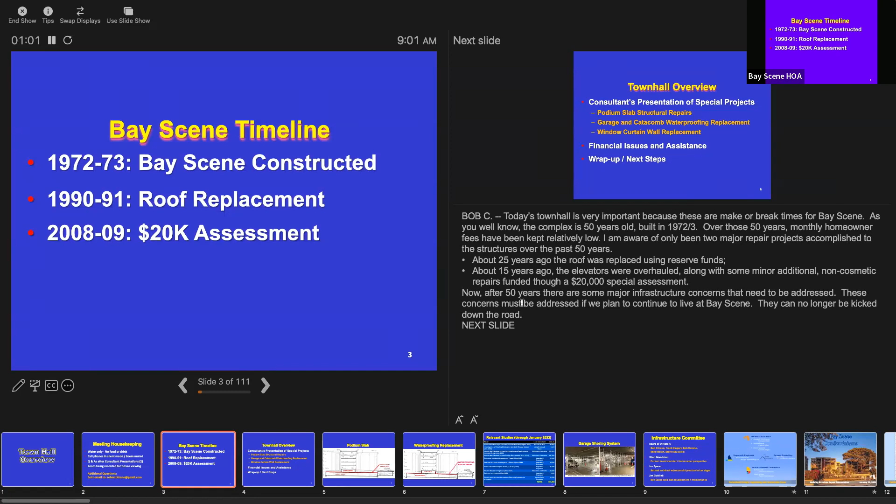Now, after 50 years, there are some major infrastructure concerns that need to be addressed. These concerns must be addressed if we plan to continue to live at Bay Scene for the foreseeable future. They can no longer be kicked down the road.

Our consultant team will be presenting detailed information on three proposed special projects: structural repairs to the podium slab or garage roof, replacing the garage and catacomb waterproofing, and replacement of the window curtain wall. After each consultant, you'll have time to ask questions.

There will be a very short break after each of their presentations. We have also asked a mortgage broker, Mr. David Stein, to explain to interested homeowners various options to borrow funds to pay for their share of the proposed special assessment.

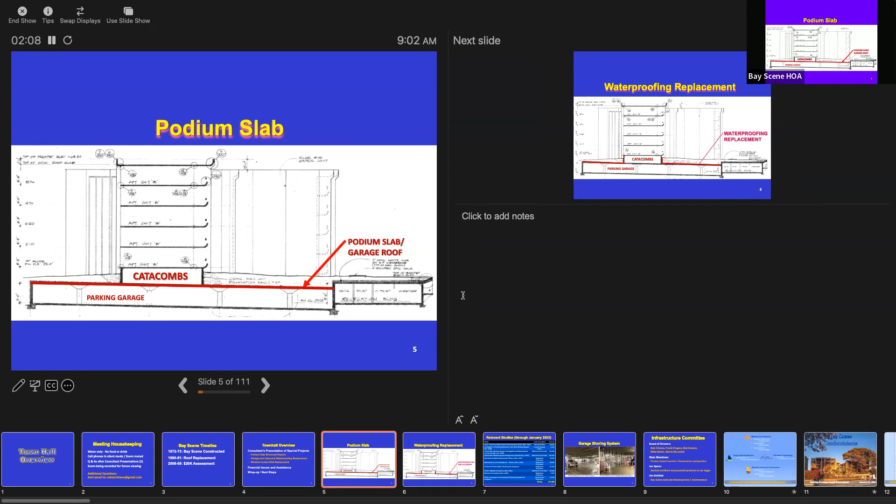Next slide. For clarity, you'll be hearing the term podium slab. The line in red on this slide is the podium slab. It is basically the roof of the underground parking garage, and we refer to that as the podium slab.

The space directly above the garage and below the first floor units is referred to as either the catacombs or the crawl space. Next slide.

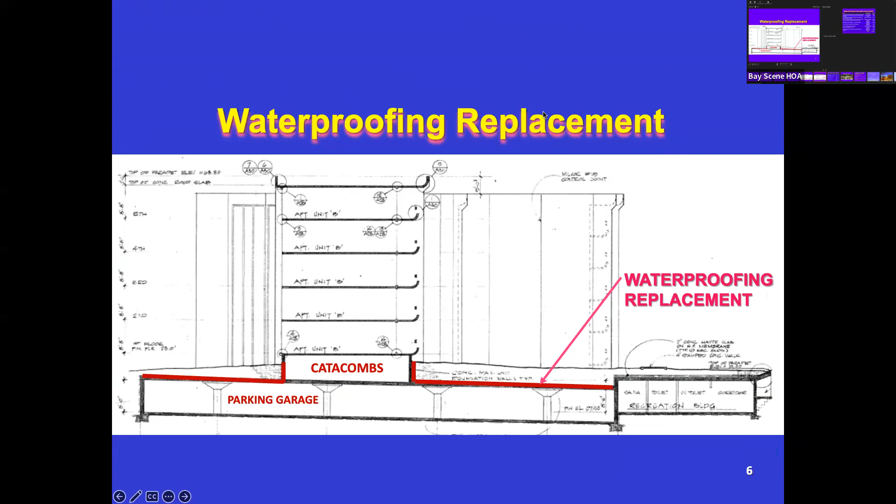Okay, this slide shows where the waterproofing is located that needs to be replaced. Basically, it is located above the garage roof, outside of the building footprint, along the outer walls and along the outer walls of the catacomb—the areas shown in red on that slide. You'll get much more information on this in the consultant presentations. Next slide.

This shows all the relevant studies we've gone through since 2020. Approximately 10 years ago, the Bay Scene Board at that time began looking into replacing the windows. As this slide shows, what started as an investigation into our windows has morphed into something far more comprehensive. It seems the deeper we dug, the more we found that our problems were more extensive than we knew.

Through our various studies, we now understand that Bay Scene is not a system of individual windows supported on each floor, rather an integrated curtain wall system that supports the windows. This means even if we wanted to, we can't pick and choose which windows to replace. It requires a replacement of the entire curtain wall system.

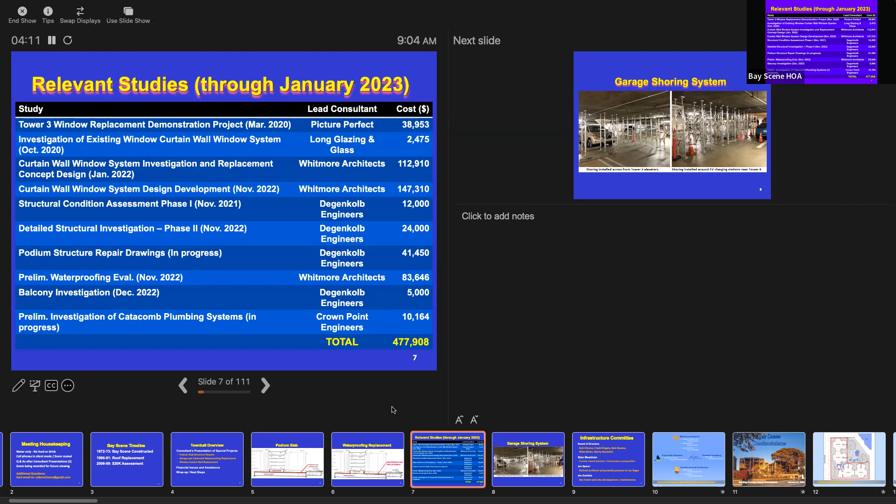Also, in response to homeowners' concerns following the June 2021 collapse of a Florida condominium, the board initiated an investigation to determine whether something like that could happen here. The structural condition assessment identified deficiencies in our podium slab that resulted in the need to erect shoring in the garage. Today, the consultants will be discussing not only the repairs necessary to resolve the current structural deficiencies, but also the root causes of those deficiencies and what needs to be done to prevent more problems in the future.

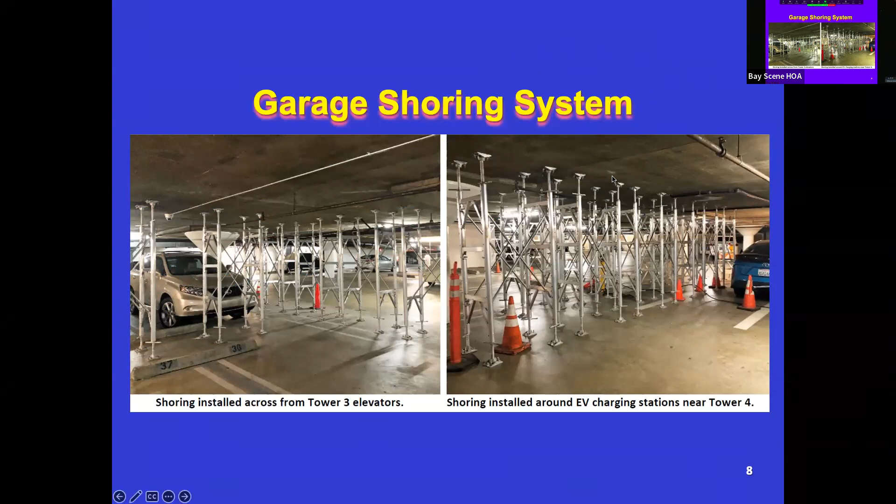We would not be here today without the tremendous support of both our consultant team and the Bay Scene Infrastructure Committee, comprised of both Bay Scene Board of Directors and homeowners. Special thanks to Frank Kingery, who has been the project manager for our consulting contracts, and Bob Van, who oversees all the financial matters, including finding an institution that will loan the association the funds for the special assessment.

Mike Nolan provides a legal perspective, and Marty is always making sure we see the perspective of often overlooked homeowners. Dan Messman has been a tireless contributor, willing to do anything, and is also instrumental in reaching out to homeowners. As the owner of a very successful architectural practice, John Sparr's expertise has been instrumental when reviewing consulting contracts and in helping us understand the technical aspects of the projects.

Last but not least, Jim Gottlieb has developed the Bay Scene website, which is very good. You should check it out, it has a comprehensive, easy-to-use section on the special assessment projects. He's also up there running the show today. Next slide.

I will now turn the presentation over to Doug Whitmore, the principal architect of Whitmore Architects, a firm that specializes in investigating building failures in the context of construction defect litigation. The expertise of this firm has been very beneficial in identifying the condition of the 50-year-old structure of Bay Scene and determining what is needed to restore it to a functional condition. Doug will introduce the rest of the consultant team, who will give two presentations. Next slide, and I will turn it over to Doug.

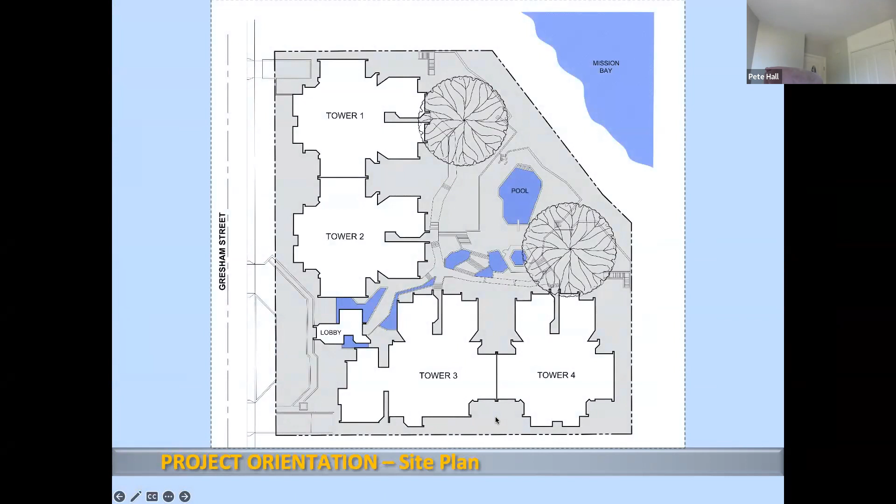So you live at Bay Scene. You probably know this by heart, but of course there are 2 buildings here, made up of 4 towers. Most people at Bay Scene talk in terms of towers and not buildings. There are two towers along Gresham Street, and two towers along the north property line, which in this drawing is at the base. To the upper right-hand corner, primarily southwest from Bay Scene, is Mission Bay, which runs all along there.

You have 2 beautiful Torrey pine trees that are marks of just how special this place is. Besides having a great view of Mission Bay and a great location, those Torrey pines are really cool. In fact, this complex is a very neat complex, and I'm sort of tacitly related to its founding father—the architect, Dan Salerno, was my boss at one point in time. I worked for Dan for about 5 years total, twice.

We knew this project because when I'd walk into the office, there was always a picture on the wall of the project. So it was not surprising when we showed up here. Next slide, please—you know what, Jim, could you go back though, actually?

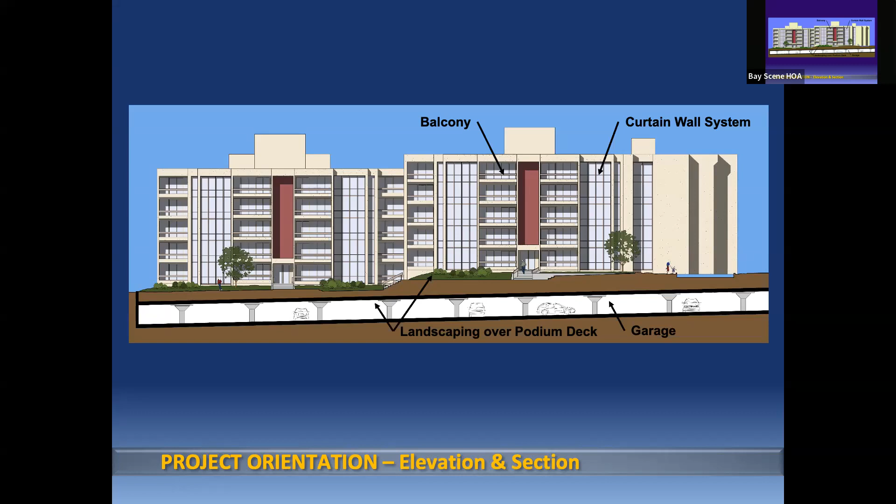We've also drawn here where the garage is. That's sort of the white band across the bottom, and you can see there's earth in brown below it, and there's earth in brown above it. So when you're walking on Bay Scene and you don't see the parking garage, it's because it's below ground. And there's landscaping, and hardscape, and fountains, water features also on that. There are steps that go down to the pool. All of that's happening on top of the garage for the most part. Not totally, but for the most part.

Okay, next slide. We will talk about the balconies in another sense, but I was really only wanting to say that in regard to the curtain wall, we're really not talking about any of the glass that's on the balconies. We're just talking about the 5-story element.

Okay, let's start with the structural repairs. As Bob indicated, they charged Degenkolb, which is Jeremy's firm, with investigating the condition of the concrete that the buildings are founded upon.

Before we go too much farther, if you parked in the garage, you've probably seen this, but if you look up, there's quite a bit of efflorescence, and when it rains, there are places where water is leaking into the garage significantly. To some degree, if you haven't noticed some of it, it's because in the past, as a temporary means of repair, little catchment devices were placed underneath big sheet metal pans, to collect the water so it didn't fall on people's cars.

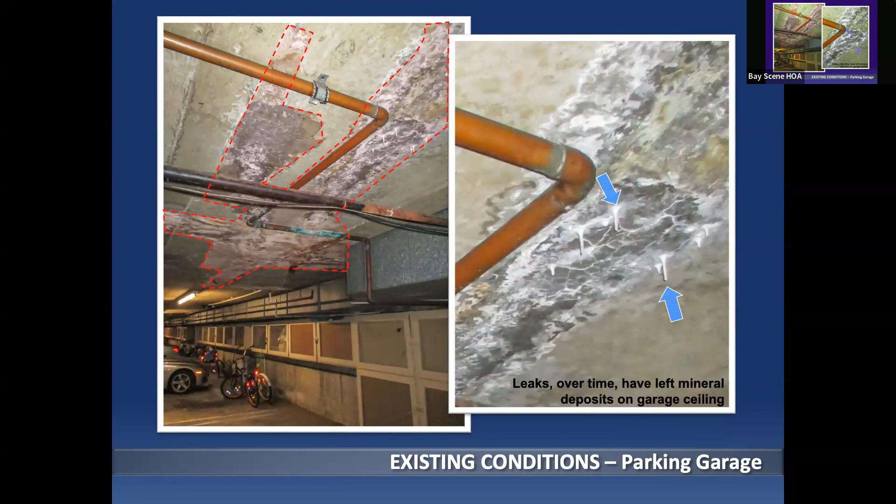So here's evidence of efflorescence, which again is longer term water coming through the podium deck, the lid of the garage if you will. To the point where, if you got up close, you'd see there's almost like stalactites of salt deposits coming down from the ceiling because of the water coming through there that brings the minerals with it. Next slide.

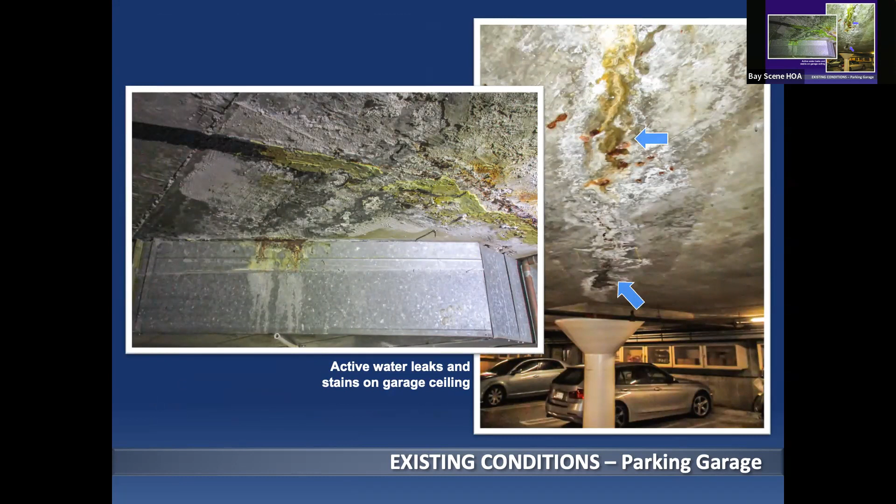More evidence - it's easy to see if you go up and look at some of the ductwork in there, you'll see stains where the water has come down. There are areas where concrete has spalled, and when I say that term spall, I mean a chunk of the concrete fell out of the ceiling and onto the floor. That's a concern from a safety standpoint for your sakes, but it's also a concern as it relates to the podium that's supporting 5 stories of building above it. Next slide.

So at this point, I'm going to show you a few slides that Jeremy provided to me of a portion of their investigation, and I'm going to pause for just a minute and let him talk about the structural repairs. This is ad hoc, Jeremy, so you get to be put on the spot.

During the course of their investigation, Degenkolb found places where the concrete had spalled significantly. The reinforcing steel, which are those rods, was exposed and corroded to the point where the corrosion had actually affected the cross section of the reinforcing steel. In other words, it's getting weaker. Next slide.

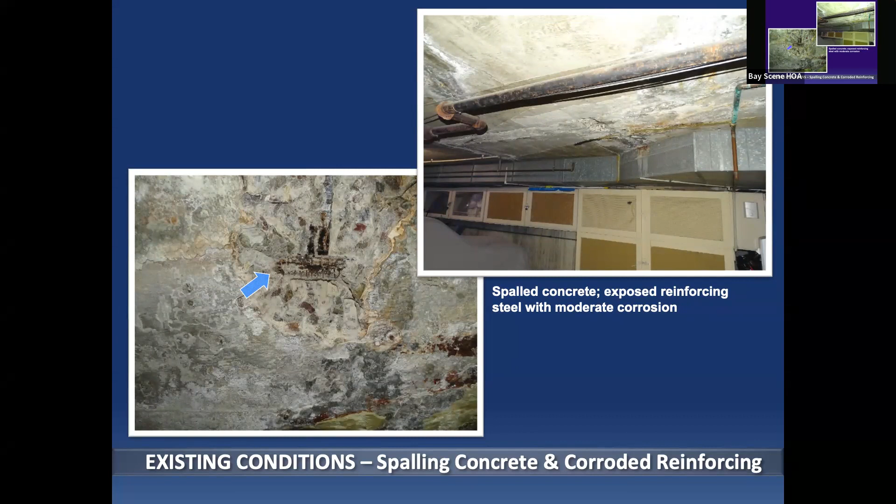And it didn't just happen once, and it didn't just happen a couple of times in the garage. It happened a few times in the garage and also on the top of the garage. Once you go into those catacombs or the crawl spaces, it was also found in those cases, in those conditions as well. Next slide.

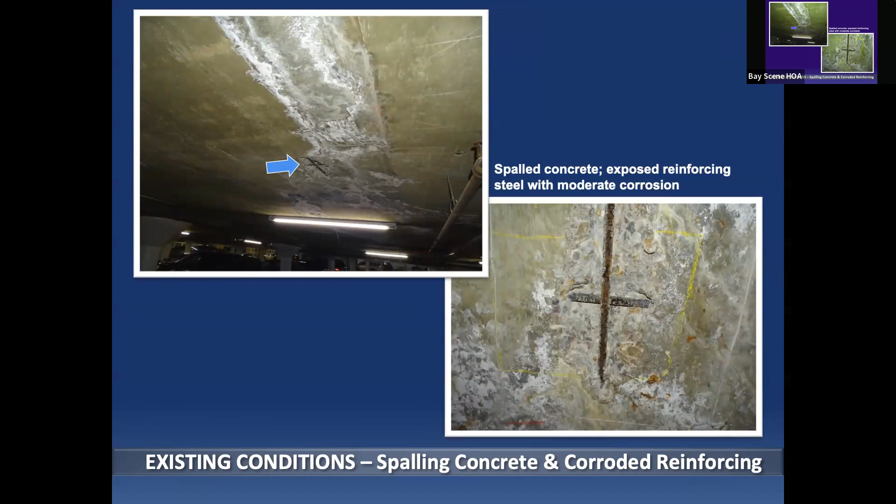So these are the kinds of things that Jeremy's crew came across during their investigation. Next slide.

Now we're in the catacombs, crawling underneath the floor of the first floor units. That's the same podium slab we're talking about, but there's no dirt in here, it's concrete. So when you look down and see that it's rusting, and you can actually see the bars, that's not a good sign. In this particular location, his report says that the reinforcing steel is severely corroded.

So with that, I'm going to pause for a minute and say, what are we doing about the current condition, and why did we put shoring in there, and what are we trying to accomplish? Because that's the first increment of this discussion. So Jeremy, if you wouldn't mind, maybe I'll come on up and interview you a little bit.

So you guys went up and you saw this kind of corrosion and you saw the concrete spalling, and what kind of analysis did you go from there? What did you do beyond that?

Yeah, sure. So I like to use the analogy of when you go to the doctor's office, you typically go in and they'll do a physical. They look you over, they maybe have you do a jumping jack or stretch. And based on that physical examination, they may see something that concerns them and want to have blood work done, or an X-ray done. You don't go straight to the MRI machine, right?

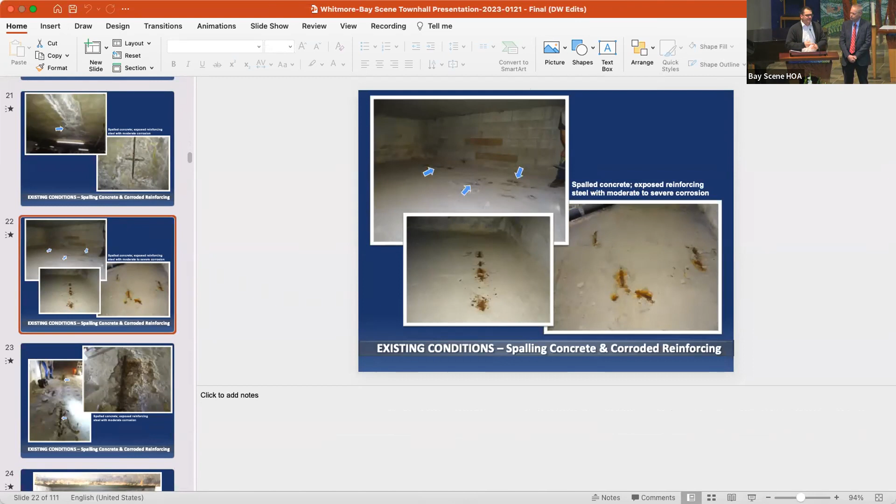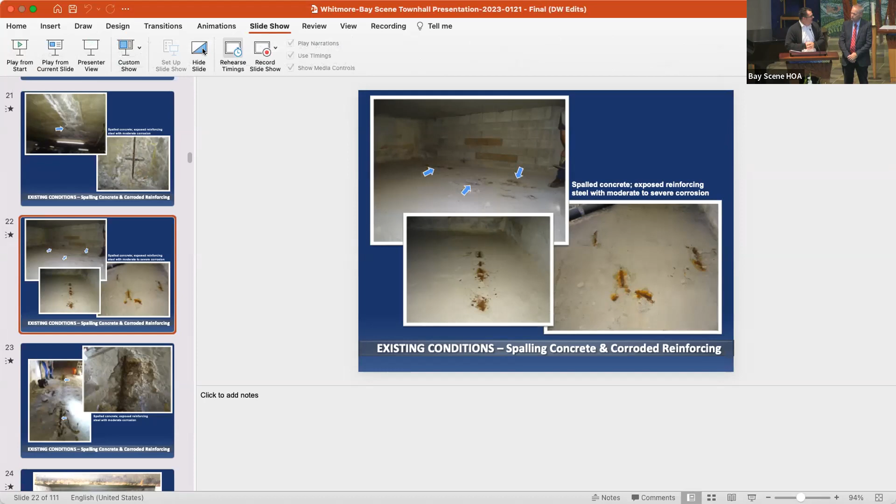Last question, what caused the condition that we're dealing with? Yeah, so there's always a few elements that come together that cause corrosion, but ultimately it's going to be a combination of moisture. Also, as part of our phase 2 investigation, we had concrete chemical testing done, and there was high levels of chlorides found, and that's not surprising because of how close you are to the coast. But as you all know, salts can really accelerate corrosion.

So the fact that there's moisture getting into those catacomb spaces - many times when I was down there, you could see little puddles and pools of water. I think Doug will talk more about the sources of some of that water. That wasn't the scope of my investigation, but we recommend that, yes, the structural repairs be done, but the structural deterioration is essentially caused by the moisture getting into that concrete. So we recommend that Doug and his team look at maybe some waterproofing repairs or recommendations to mitigate additional water from getting into the slab. Great, thank you.

Jeremy's team recommended an investigation related to water getting into the concrete, and our firm was retained to do that. We had already worked on the windows and were refining the window design, but concurrent with that, we embarked on investigating the water intrusion causing the problems. Our presentation will focus on those findings.

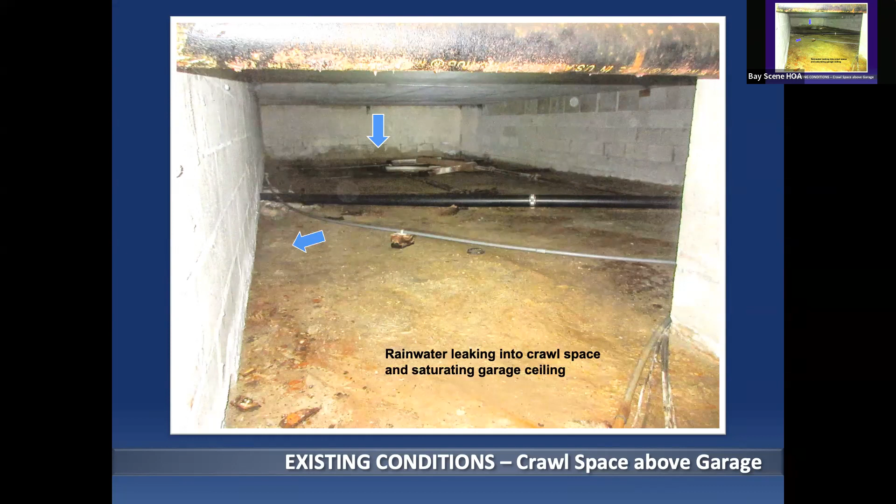More of the same. So when Jeremy was talking about water being a source, if you bring in salt-laden air or water into this area and it just sits on the concrete, it gets a chance to cause corrosion issues and affect the concrete. Honestly, people that have built in construction long enough know that when you do concrete close to the coast, you have to keep an eye on it, because that's a phenomenon that does happen. You need to be careful with that.

More of the same, rainwater coming in, and often it's at the base of the wall, but you can see on the right-hand arrow, sometimes it's higher than that. It's coming in at higher levels. I would say at least a third of the time it's higher than just the base of the wall.

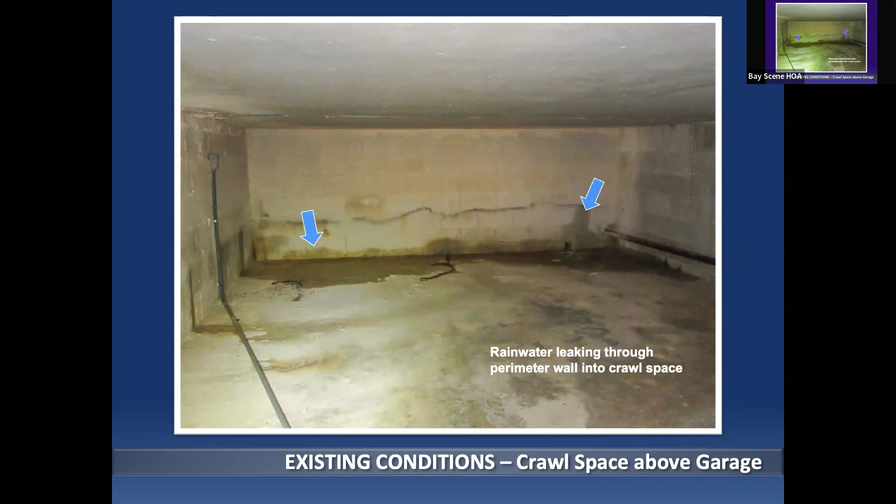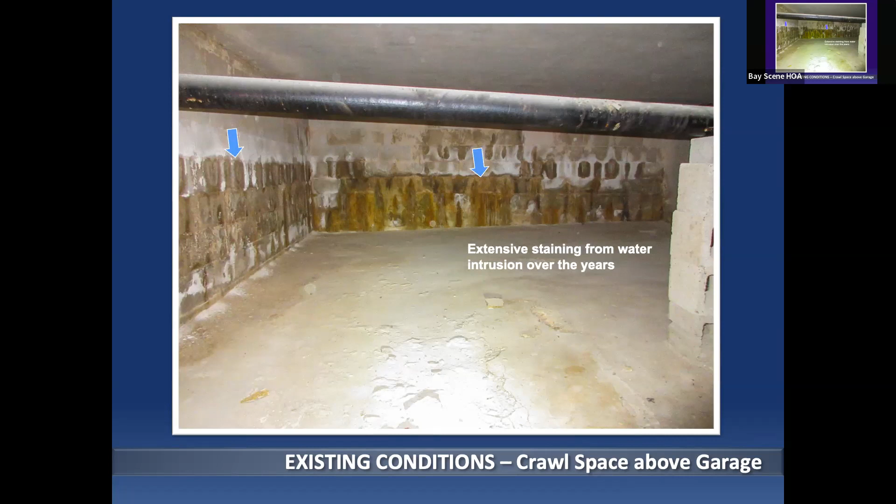This is an area such as we would have seen before the rainfall, where we just had a significant amount of staining from past leaks without the water actually showing up there. That's the result of years of this kind of leakage happening.

So this shows those stains. We have water coming through in an area where one of the repairs was attempted.

As Jeremy mentioned to me in advance, he said even some of your slides show some of this corrosion. So here's a photograph in a leaking area where we saw the steel reinforcing exposed and corroding.

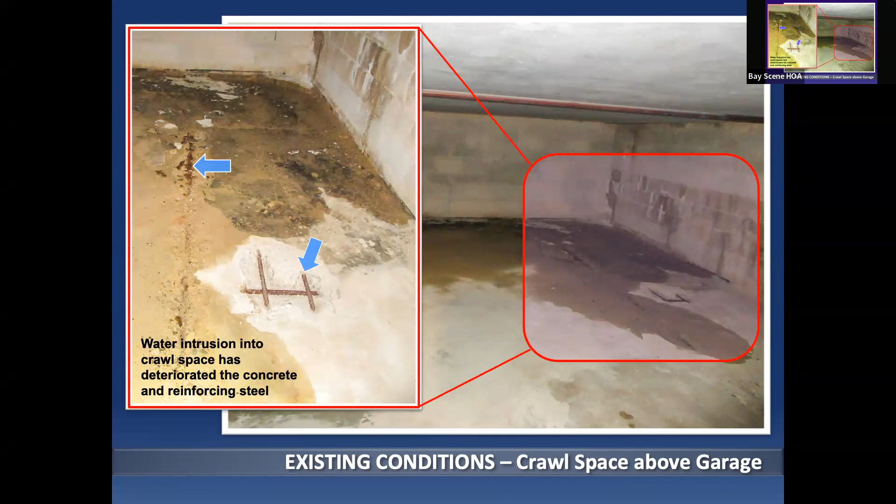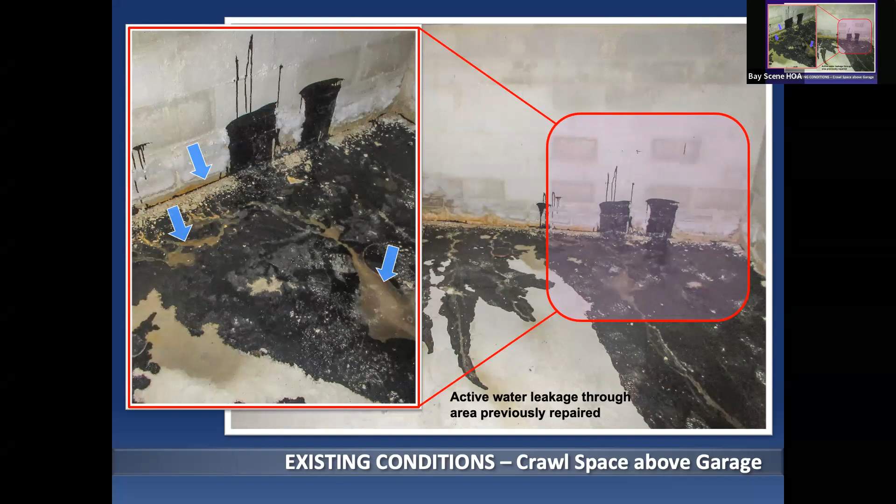Sometimes we scratch our head when we see some of the repairs that have been attempted. We're not really sure what the black bituminous material is, especially since it's only applied at the floor level and not really up onto the walls. But suffice it to say, the blue arrows show water coming in where a past attempt was made to repair.

It would be a challenge if it was only the walls we were talking about in terms of water intrusion, but there are other factors that also need to be addressed. One of those factors is the plumbing systems that are below the units.

If I were to simplify, there are three kinds of plumbing systems at issue. One is the storm drain lines. Those take the water off the roof, maybe off some balconies, runs it down and takes it out to the storm sewer outside. So it comes to this hollow space and then runs to the exterior.

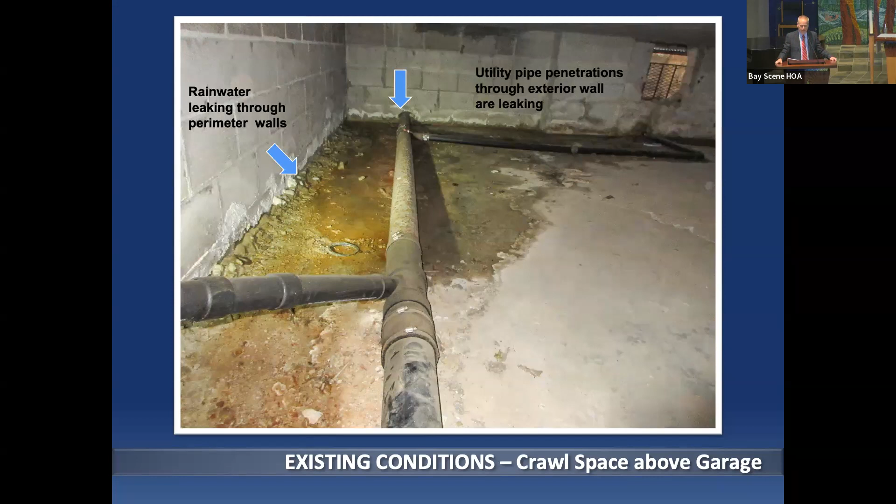And then the third is water supply. So you've got roof water, wastewater, and the clean water being supplied to the units. All of those systems are leaking, and leaking pretty good. We'll show you, next slide please.

In some cases it's just a difficult thing to do right, to run that storm drain at the top of the concrete through the exterior wall where the waterproofing is. We are getting water through the wall at penetrations. They just have to be detailed correctly. Next, please.

We also have places where new pipes for repairs were brought in and touching old pipes. In fact, they were connected to old pipes that have holes in them. The photograph on the right shows a deteriorated pipe where you could actually see inside it. On the left, a different type of storm drain line needed to connect to that connector, but there wasn't enough room, so it was just loose laid into there. Anytime water gets to that point, it's not making it outside, it's coming back inside the catacomb.

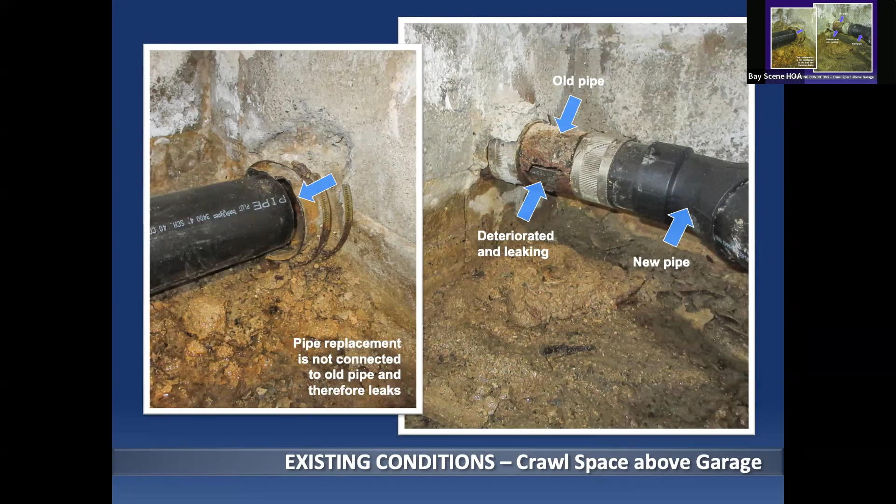Besides the age and condition of the pipes, there's also a problem with the support for the pipes, and this goes all the way back to initial construction. This isn't somebody jerry-rigging it along the way, this is the way it was left. There are concrete blocks stacked up, loose, not cemented to each other, with blocks of wood holding things up, so if you bump it, that takes the support away from the piping. Any workman down there has a chance to dislodge pipes.

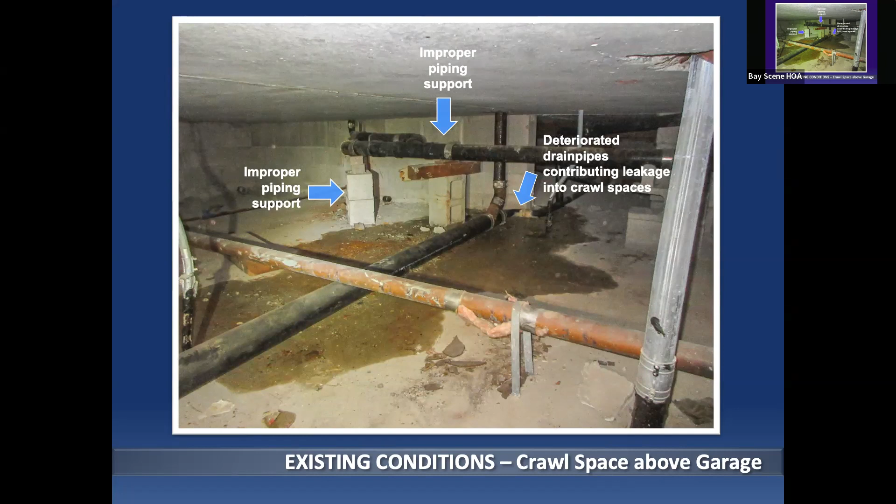Every time that happens, you're putting stress on a long line of pipe, and then all of a sudden you have stress on those connection points. In this slide, though it's not a close-up, that arrow on the right towards the back is a leak location in one of the pipes, near this poorly supported section. In the foreground, there's actually a proper pipe support there, a banded support for that water line that keeps it up. You'd like to see a lot more of that, supporting it from the ceiling of the catacomb in a similar way. Next slide.

When we dug our test pits, we found that it didn't just happen above ground, it also happened below ground. So there's been a migration of that bitumen.

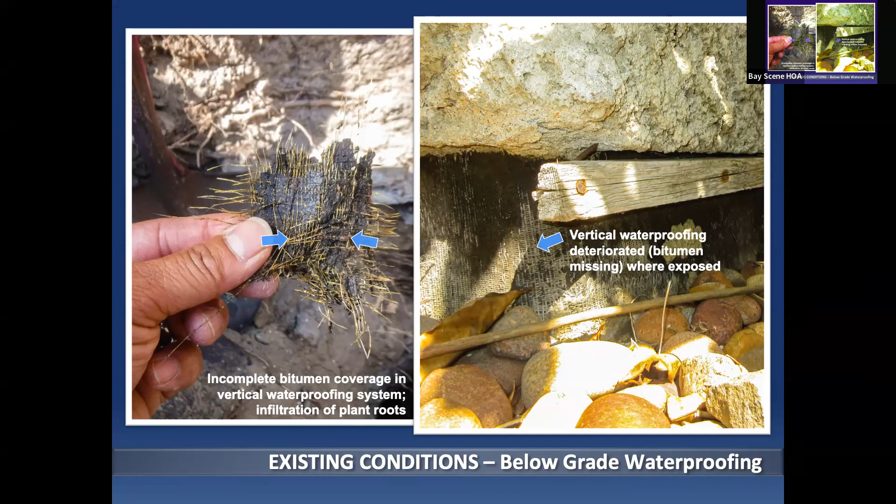And then in addition to that, which you're not going to see from where you're sitting, there are plant roots that have woven themselves into this membrane. It wasn't a great membrane in the first place, and over 50 years, plant roots look for water sources. If they find a water source, they grow in those directions, and then it starts to dislodge the membrane from the wall even more than it already was. So we have an issue with the waterproofing itself, its age, it's worn out, but also the fact that there are plant roots, tree roots that have grown into the membrane.

If we can go to the next slide, please. This photograph on the right gives you a lot bigger picture of some of those roots. We're not talking tiny little things. You can see the pry bar that's there next to the tape measure on the right-hand photograph. Those are roots in that membrane system. Then again, Kirsten's holding a piece of the membrane. That particular membrane is actually a horizontal membrane, which we haven't talked about yet, and it also has roots growing in it.

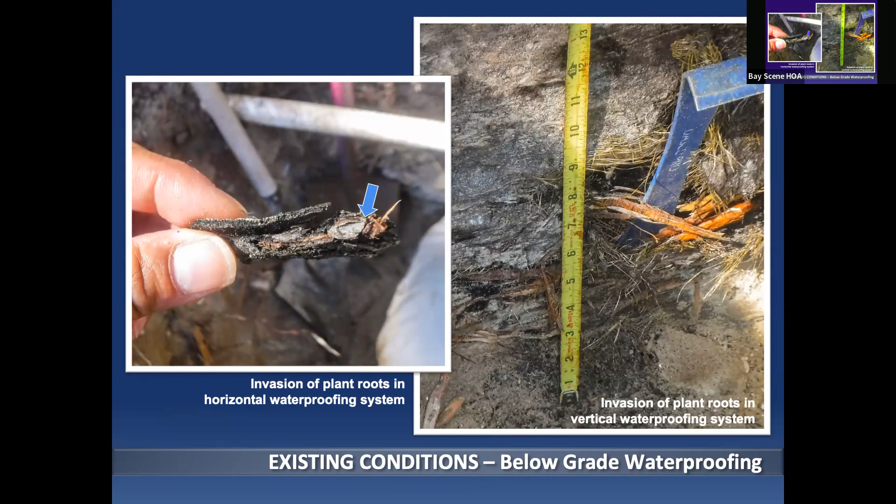Next. So in general, there's waterproofing on the outside of the garage. Honestly, it seems to be performing pretty well. We haven't seen a lot of leaks through that. One of the saving graces is that the perimeter walls are not concrete masonry, they're poured in place concrete. That tends to not be waterproof in and of itself, but the density of the material and how it's placed is much more, it keeps the water from getting in, keeps it out.

But you also have waterproofing on top of the garage. There are areas where the landscape goes over the garage, and we have water coming through that membrane and into the garage. Then also we have water that goes into the crawl space from the walls, which we've spent a lot of time looking at photographs of. It gets into the crawl space, but then, because once it gets in the crawl space there's no waterproofing, it wants to find cracks and find its way down in. And of course, you put enough water up there and let it pond, and with nothing to cause it to evaporate, it eventually finds its way into the garage.

Next, please. So based on our evaluation, our recommendation is that the waterproofing system at Bay Scene be removed and replaced. We've attempted to look at the extent to try to limit that, and I think initially we were hopeful that we wouldn't have to excavate around the whole perimeter of all the buildings. But after we looked at our second round of information after rainfall, I concluded that it needs to go around all the buildings because 90% of them are showing water intrusion.

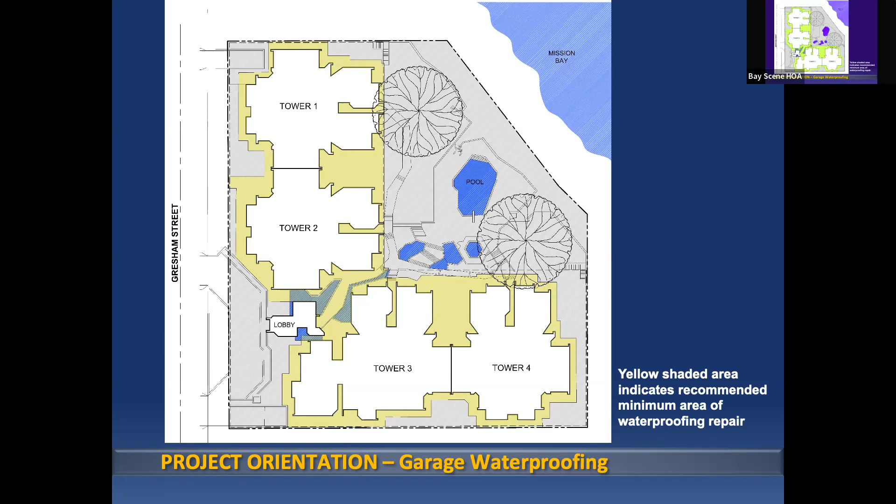Are we through with this part of the slides, Jeff? Next, please. Yeah, we kind of are.

I'm going to run through one other subject. I didn't have any place else to put this. But as part of Jeremy's investigation, while we were looking at this, we did become aware that the edges of some of the balconies are failing. And by that, it's the same phenomena that Jeremy was concerned about with regard to salts getting in and causing corrosion into the concrete, to the point where some of the outer edges of the balconies have fallen off.

Now, most of the ones where it's fallen are the ones that are real close to the ground, like maybe in the past they got hit by a lot of irrigation water and things, so they're probably worse there. But there are other areas on the buildings showing signs of the same thing happening, at like the third or fourth story. So the last thing you want is one of those chunks to fall off and hit somebody.

So Jeremy did do an investigation of the balconies. He has in his report similar priorities between high, medium, and low. And later on, when we talk about costs, the scope of this project is really just the high and medium ones. We're not saying 100% at this point in time. We will have a prototype repair that, if in the future more of this begins to happen, could be applied to the other decks that aren't part of this repair.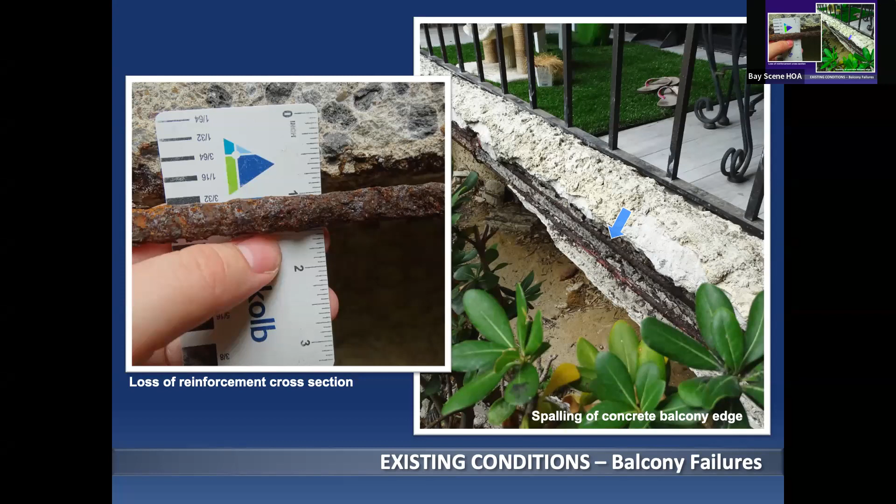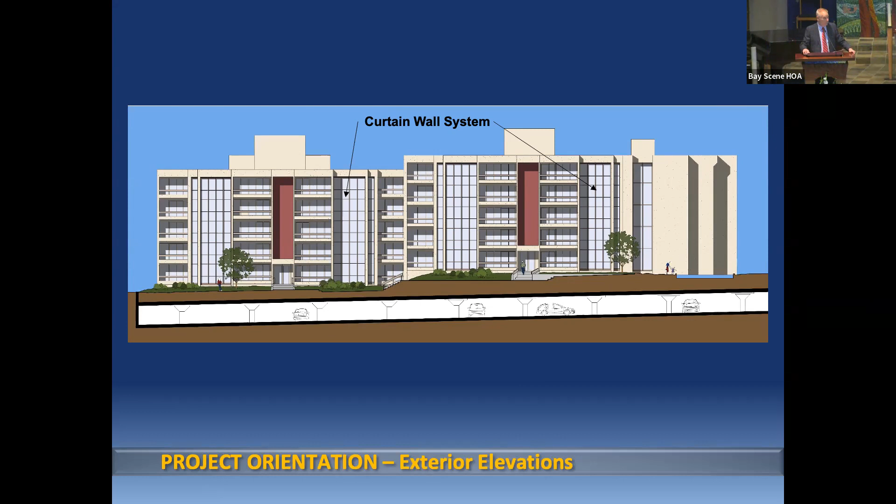So anyway, curtain walls - you saw that on the photograph. Let's go to the next slide, and I think this is a visual simulation we had last year, but it will give you a good picture. Here are the existing awning windows in your units - you can see how the existing setup is, the awnings project out, and from the inside they open out. In the proposed solution, instead of awning windows at the floor, there would be what are called casement windows, which are swinging windows, accessed above that middle bar that's there.

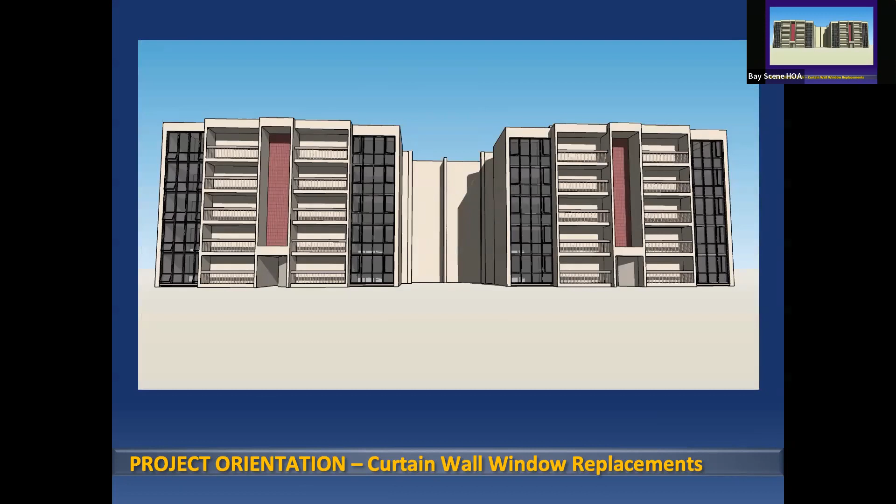Okay, let's go to the next slide. From the inside, you all know what it looks like, but this is one of the units that has louvers - some people have designed their window coverings to fit with the module that's there. Not that that's the only reason you would do something, but it's one reason we've tried to stay with the existing design. We've also been concerned about the city's impact, since pretty much any project over 35, now 40 years, has to go through a historic resource review.

Sometimes it's the silliest thing ever when you're working on a little dingbat house that you have to go show them pictures of what this looked like. But nevertheless, they're going to ask for that on your project because it is of that age, and we will have to let them review and determine whether Bay Scene is an historic resource.

So the more that the design looks like the existing, the less of an impact that you're going to have, the less of a chance of getting pushback from the city there. And we have actually proposed and probably will do a preliminary review with the city. We may well, based on your recommendation, but also I've been thinking the same thing, talk to them as a preliminary review before we go too much farther on the ADA applicability to the site. Okay, next slide.

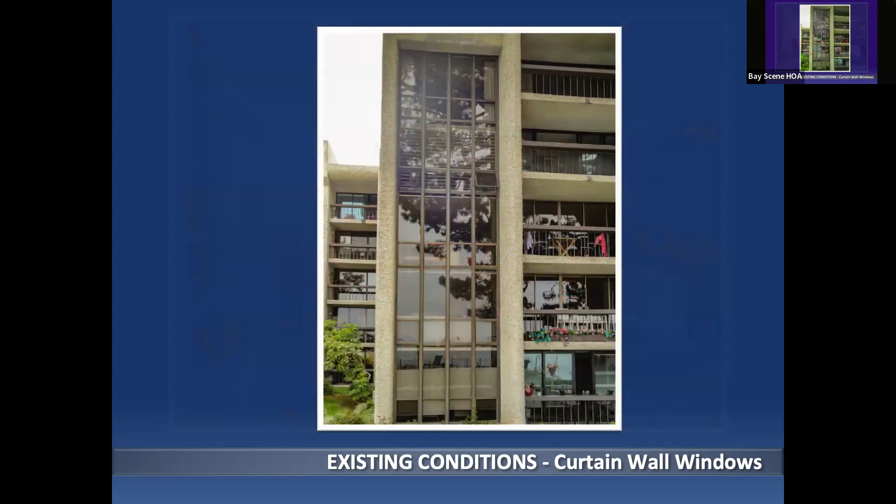Here's the outside of the same that we just took a look at. So again, we're not talking about the sliding glass doors. I don't mean to beat a dead horse, but we're talking about the 5 stories of window.

Next slide. So there are a variety of conditions at Bay Scene that have led to our conclusion that the system is worn out. Starting at the base of the building, there are plenty of locations that over the years have been allowed to be buried into the ground, and there are places where the ground has sloped back to the building. And so it's deteriorated the aluminum.

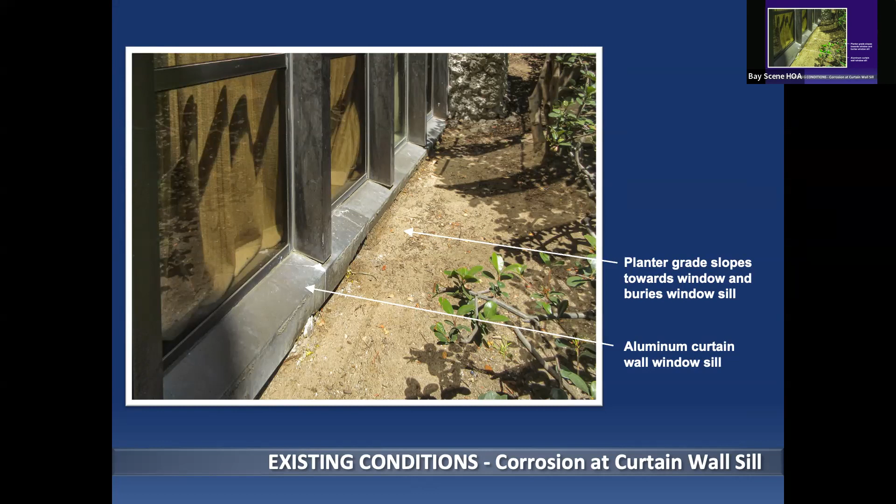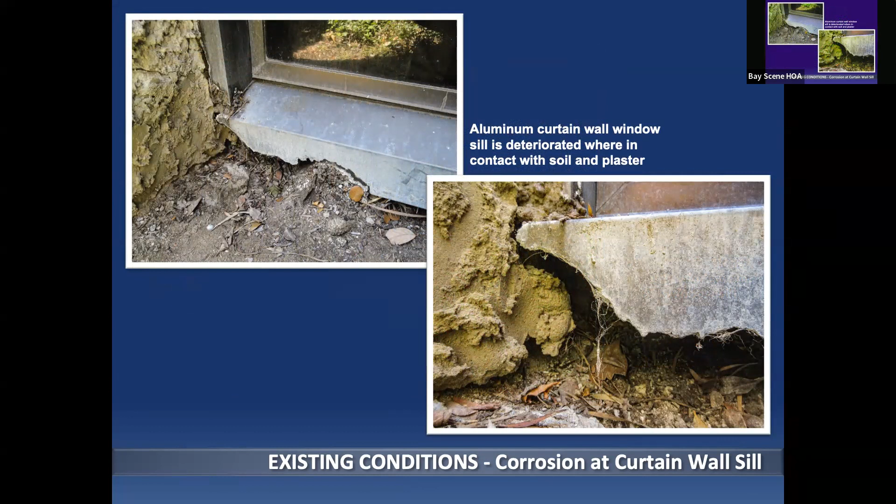Next, please. In some cases, significantly. The sill pan at the bottom of the unit of the curtain wall is very deteriorated in some locations as a result of that.

More of the same, but that's the kind of corrosion that we've seen at various places across the project. We didn't point to every single one of them, but there's some even behind those arrows.

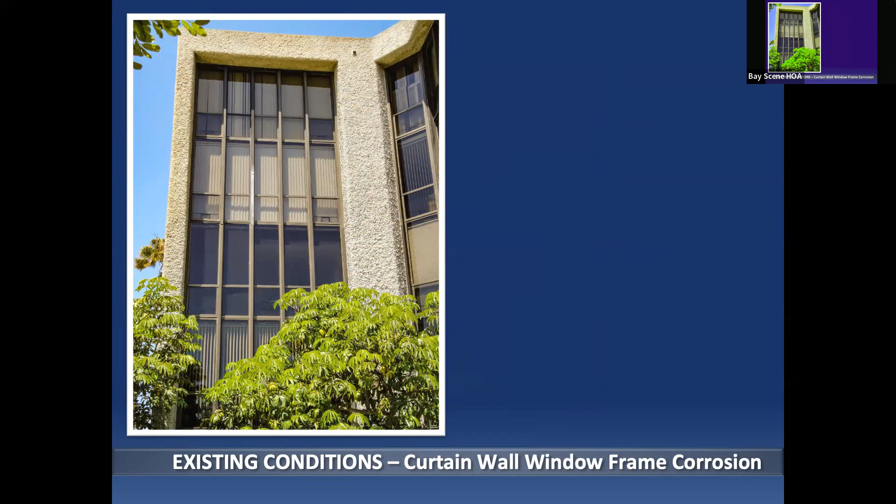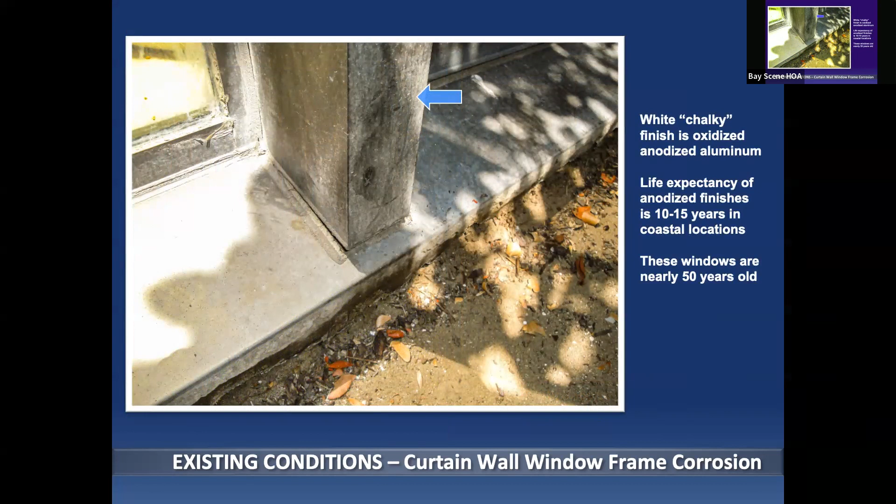There's also quite a bit of pitting that's happening, another type of corrosion that happens. I think as you get this salt-laden moisture, not always rain, sometimes it's just very moist air, and you get condensation that happens on your metal. It collects and over time begins to corrode the metal. So that happens pretty frequently.

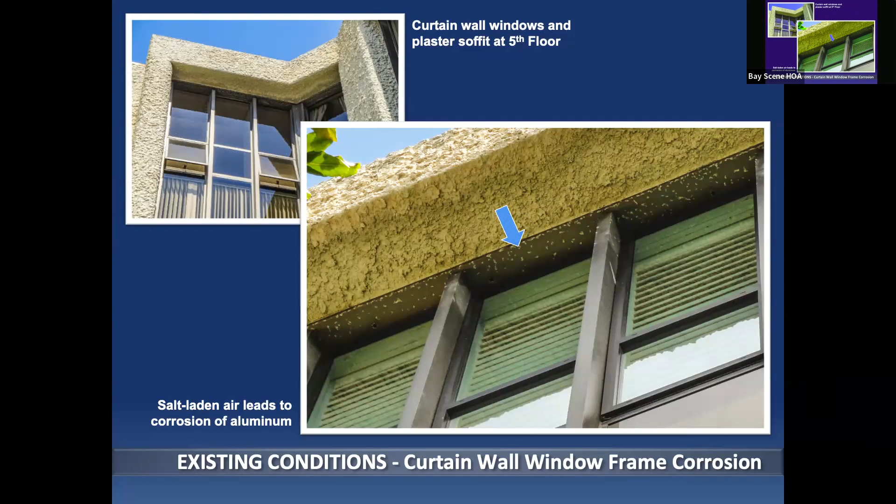Next, please. There's another view of the same kind of thing. The one on the right is at the top, and then you can see the one on the left is also showing pitting even on the vertical members.

Moving into the window system itself, there are effectively rubber gaskets that the windows fit into, which keep water from coming in and air from coming in. Well, those gaskets are 50 years old and they're not working anymore. They've spent their useful life and they need to be replaced.

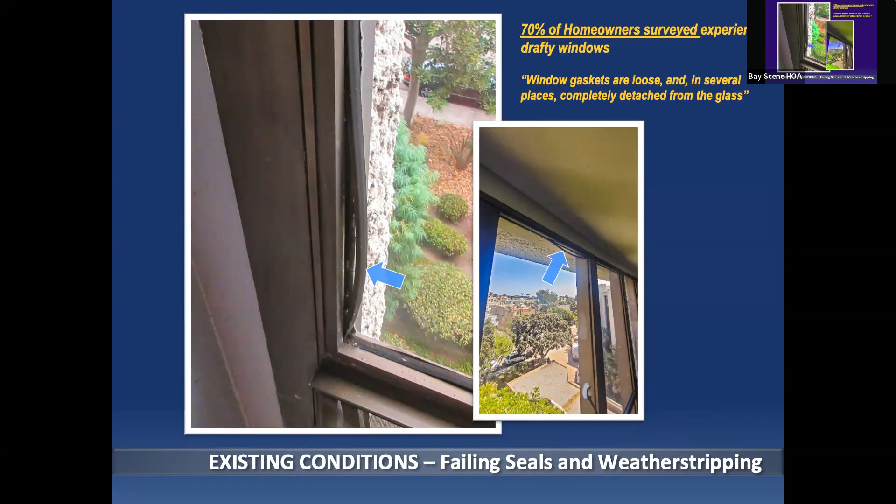I think as we went through this, one of the best things we've done so far is the homeowner survey. We applaud you for being so good at responding and giving us your input. This one, actually, we quoted 21% of the windows, homeowners are saying that their windows are experiencing leakage.

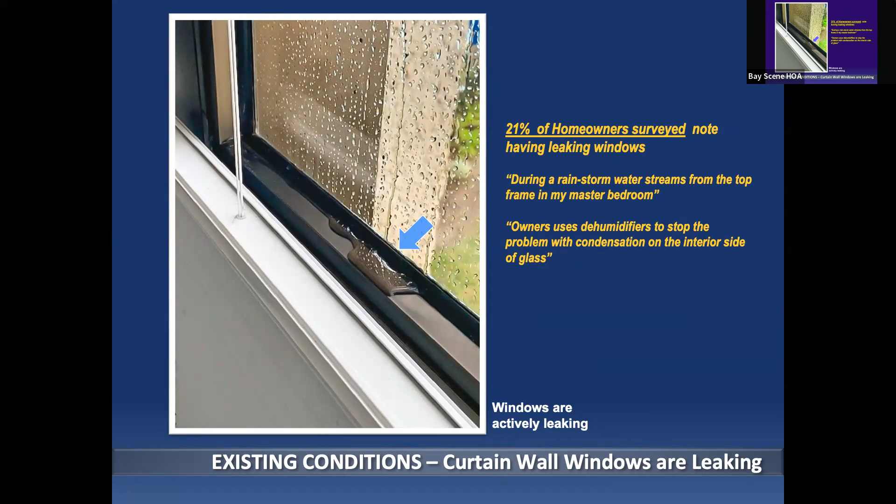Here's a couple of photos, same window system, different window location. This particular owner, once or twice a year when it rains, has to pull their carpet back and dry it out because they get so much leakage into their unit.

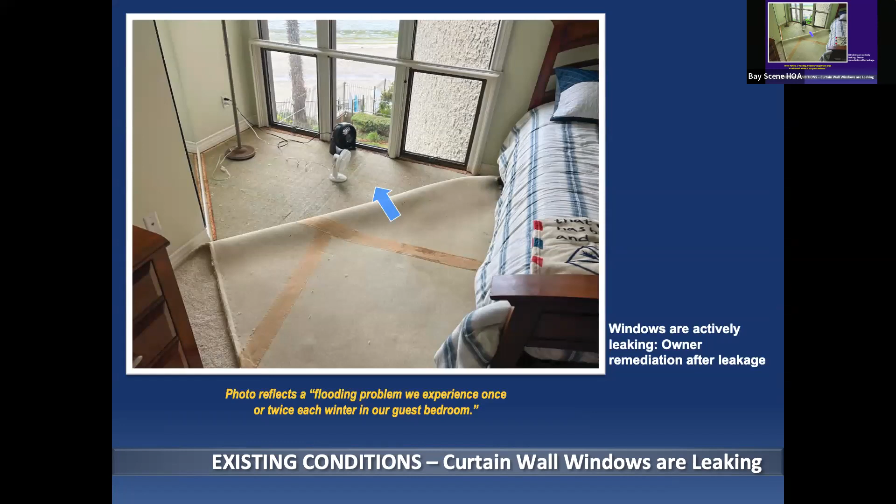So repairs have been implemented over the years. When you have this sort of integrated curtain wall system that all goes together, you're left with what pieces can we take out and put back? Those could be replaced or repaired. But then the rest of the units that stay in place, how do you do that? The sort of go-to solution is we're going to apply sealant to the outside of these things. And that's happened a lot at Bay Scene.

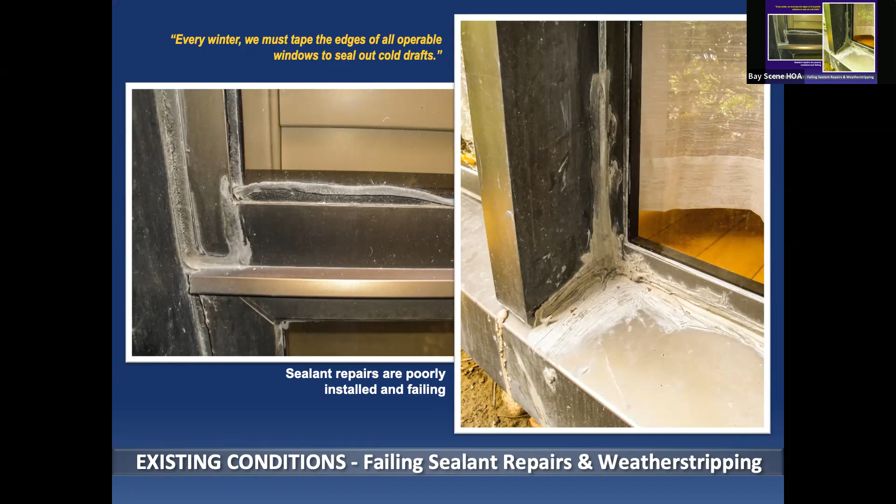While we're only talking about 21% of the units having leakage today, there's a whole lot more than 21% of the units that have evidence of this kind of sealant repair over the exterior of their aluminum curtain wall. They're not all as bad as that particular job, but you get two different kinds of things failing: sealant joints that are cracked and open, and gaskets that are also failing, to the point where the hardware is corroded. Now the windows don't close all the way. You can see that happening at the top there.

Where the sealant repairs have been affected, they are not working, so they are failing. This particular sealant must have been the wrong one or an incompatible material because it's just oozing out of the joint it was placed into. Next, please.

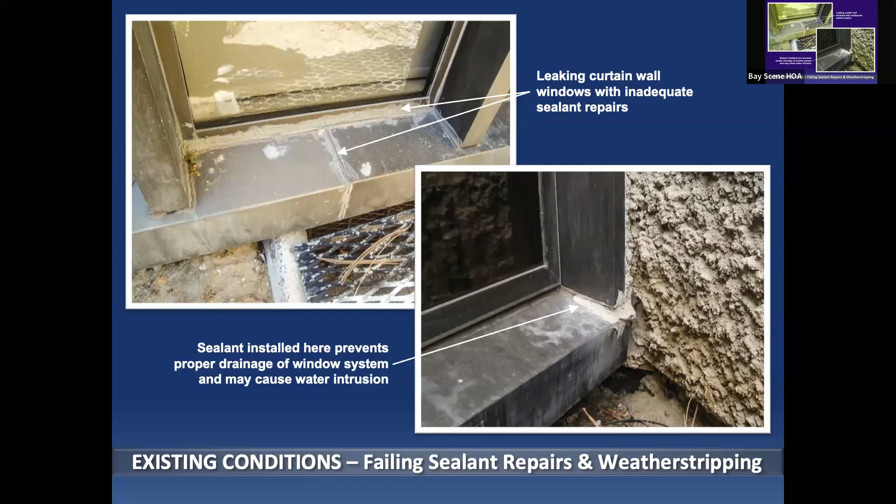There's been a considerable amount of effort to try to keep water out. Unfortunately, in some places, it's a little misguided. At the bottom right-hand photograph, the sealant that's been applied there is actually where the water drains out of the unit. So by putting sealant there, somebody's actually created a dam that forces water to stay inside the aluminum system. Next, please.

More of the same kind of thing. Next, please.

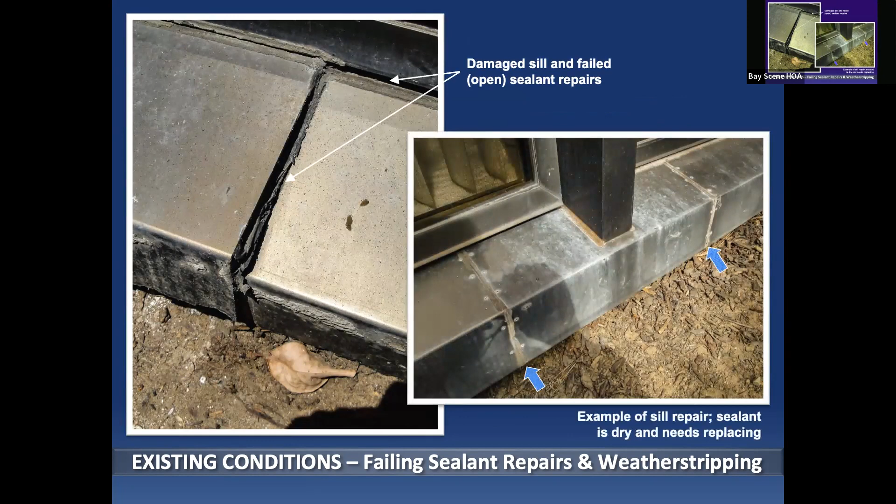This particular quote says, can't shut one of the bedroom windows, it's opened about an inch, cold air flows into the bedroom unless I block it with pillows. This set of photographs again is just showing some of the sealant joints that are failing and pulling out. Next, please.

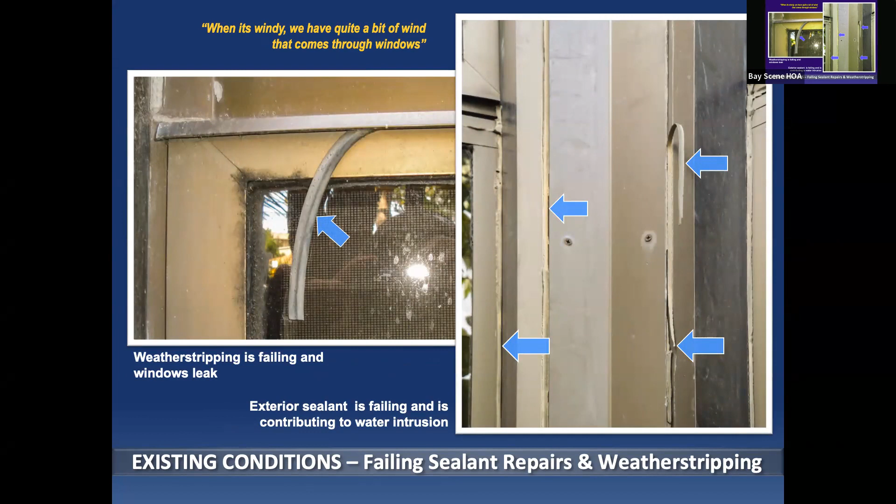There are other areas of the curtain wall assembly, especially where you have these 135-degree angles. They kind of go around the corner, with a 45 coming into a flat plane. So you have these filler pieces, and those filler pieces are also open and leaking. Please.

Unfortunately, the original construction, the stucco or cement plaster on the wall, was so thick that it came onto the aluminum. Two things have happened over time: because there's no lath at that extra thickness, the stucco has cracked off and left openings. In addition, we also have areas where this cement matrix gets wet and is in touch with the aluminum, so it's corroded the aluminum in certain areas a pretty good amount.

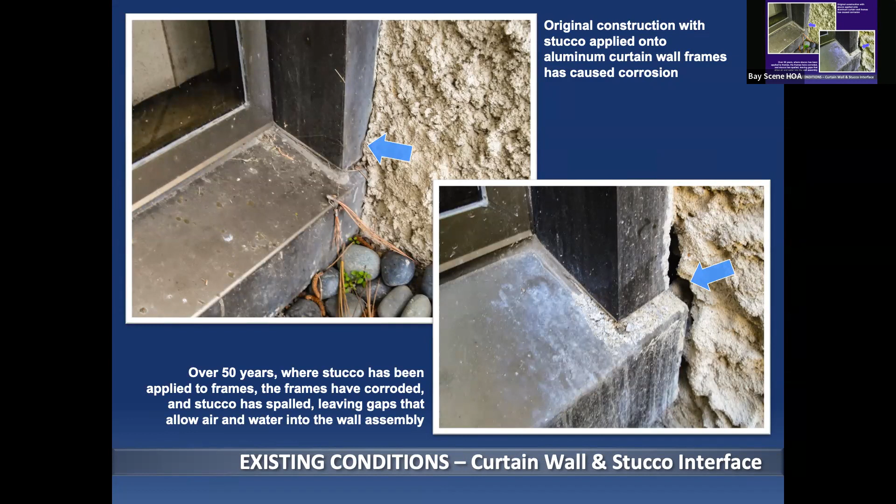Next, please. I think on that last one you could actually see, but this is a good one — these will show you the corroding areas where the stucco has been in contact with the metal.

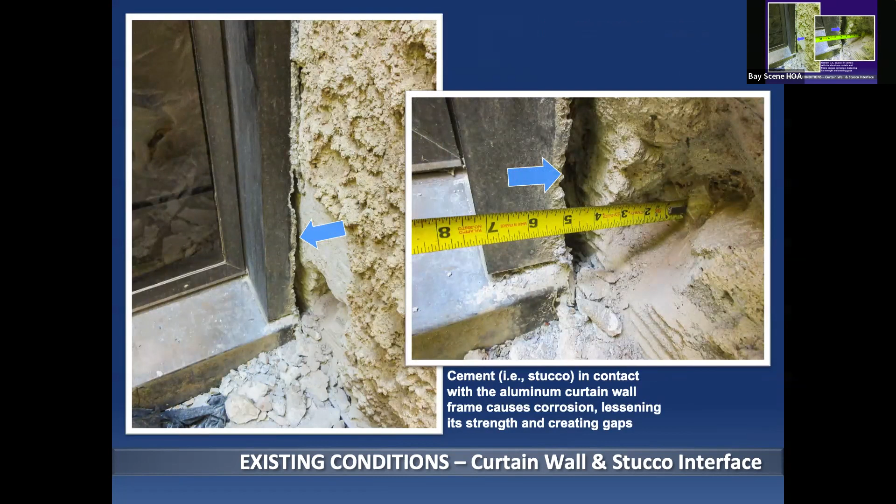Next, please. Yeah, this is a great one, it shows you the amount of corrosion that's happened now. To be honest, we cleaned that joint out a little bit before we took the photograph, but nevertheless you can see the amount of corrosion that's there.

Some folks have said, I've had enough, I'm going to just go ahead and replace my own windows within the curtain wall system. That's had varying success — some people have been happy with it, others have found the existing structure doesn't seem to support those new windows very well, so they have a problem with binding and racking and things like that.

There haven't been that many replacements across the project, but when we consulted with Jeremy, one of the things we thought about early on is, can we just keep these verticals that are there and put a new system into them? Wouldn't that be better? He said, well, unfortunately, if you're putting in double glazing, it's heavier, and the connection points we have don't really facilitate supporting a full 5 stories of double glazed windows in an assembly like this. So the long and short is no, you can't do that — we can't just keep doing more of the same.

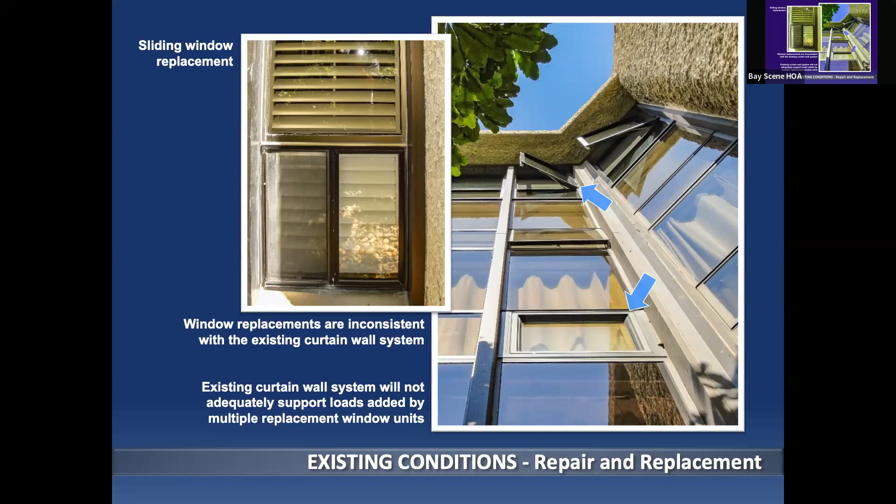These next couple pictures are just to show you the menagerie of the kinds of looks that you're getting on the buildings, because some people do have those casement windows now instead of the awnings. Other people have installed a slider, and some people have replaced their awnings, but they don't look like the other awnings. So it's getting a little bit of a menagerie there.

The association originally had hoped that they could use a specific vendor who had worked with them and provided some preliminary pricing on this project, and suggested putting in a sort of a prototype system of windows. So this is the hallway on, I think it's Tower 3, and it was done in vinyl and not in aluminum.

One of the downsides of vinyl is it's heavier. There have been some concerns about the code effectiveness of this, and we just haven't spent the time working on that, because this is kind of a one-off. There isn't any other corridor that has this kind of condition on it, so it wouldn't really impact much. But the heaviness was a factor, and the fact that this had to be done as a window wall, which means we'd have to push everything back in. So the heaviness and taking real estate away from everybody's unit kept us from pursuing this as a solution.

And by the time this contractor got done and gave revised prices, they had pretty much doubled or tripled after doing the one. They'd gone way up. The photo on the right is just showing some loose elements, showing how the facing is not even tight there. Not a great solution.

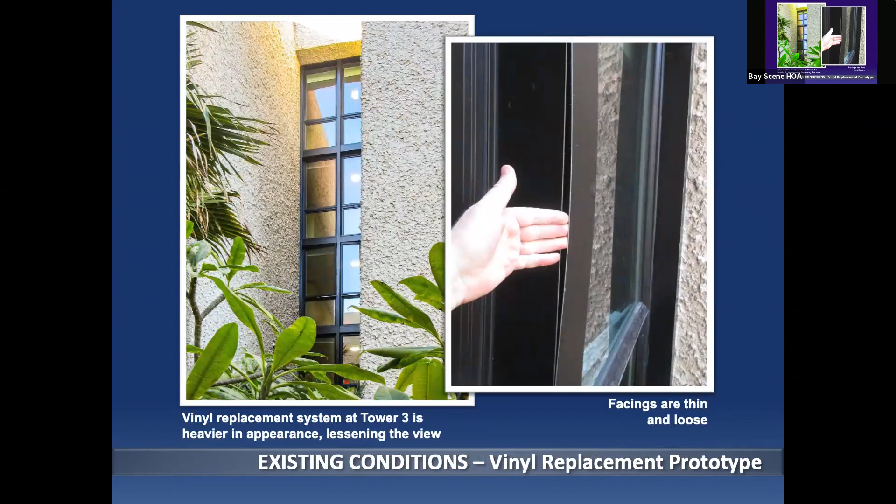We all know about the awning windows, but the problem at Bay Scene is awning windows are the only way of ventilating the window system, and they're at the floor level. And so that's a hazard. If you were to try to design a building with awning windows here, you couldn't do it unless you had limiters, which wouldn't allow you to open them all the way. You'd have to restrict how much you could use those ventilating units.

It's a hazard if you have pets. It's definitely a hazard if you have grandkids that crawl around on the floor. And if your old screen isn't working very well or doesn't fit and it's not there—not that I would ever advocate that a screen is a safety feature, it's not—but you have no impediment.

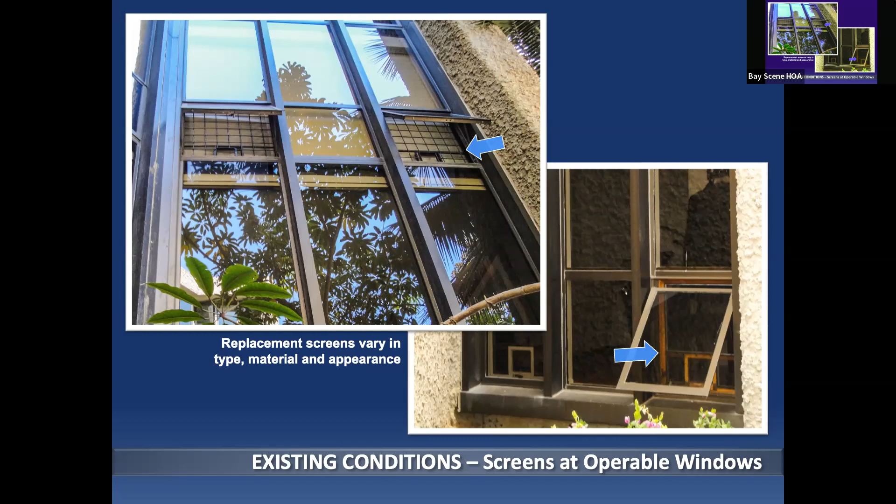It kind of shows you the handle and the screen as provided. And some folks have addressed this by putting in their own sort of grill with the handle that's there, also installed in varying ways. You can see the one on the right is done with a wood frame, and the one up above on the left appears to have been done with metal.

Corrosion is also beginning to beset the curtain wall system itself. So this just shows examples of the corrosion on some of the hardware.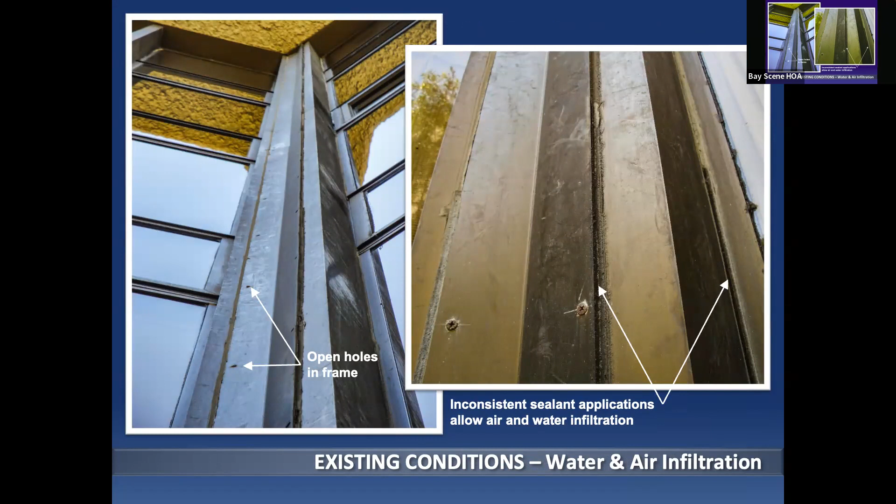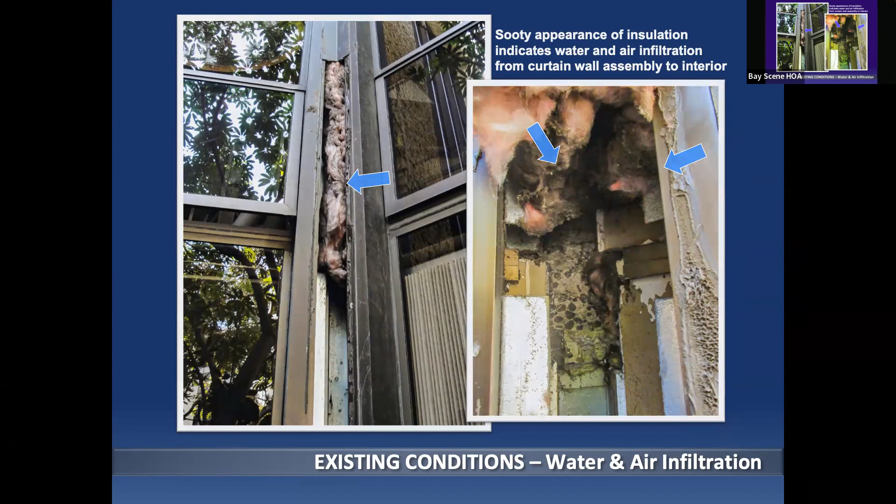So we could see the insulation was discolored, and that's in my line of work usually a good sign that you're getting water and moisture-laden air into the insulation cavity. Because that stuff should have been pink, period. Not dark and grimy and sooty looking.

Then when we took the insulation away and looked at the steel framed members there, we also noticed corrosion at the junctures, rust obviously on the vertical studs, as well as sort of a calcium-like electrolytic reaction where the sills hit the concrete at the base. That's in the left-hand photograph.

There are angles at the bottom of the curtain walls that I think were originally intended to support it. However, they're not really used, but nevertheless they do support part of the curtain wall system—they're not taking the main load for the whole 5 stories or anything. They probably provide support for the lower story or two. And I'm not downplaying it, but there is a significant amount of corrosion on some of these support angles too.

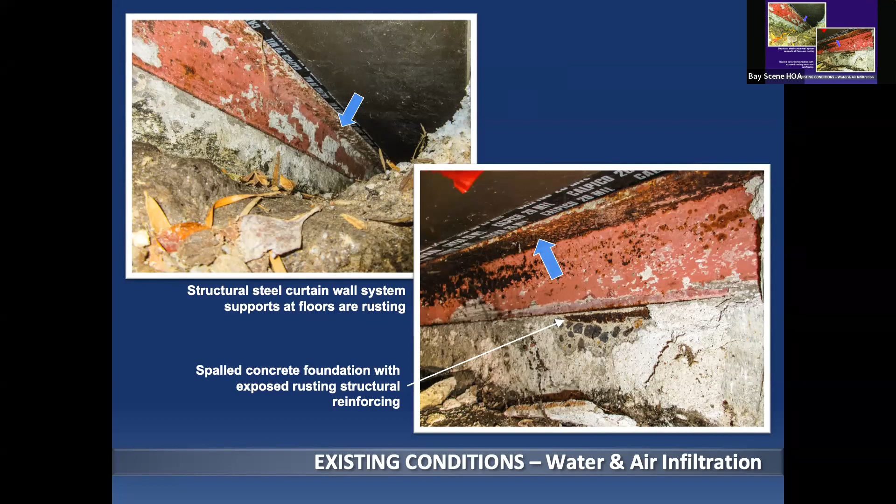One of the complaints we came across initially in the job was the fact that if I'm in my unit, I can hear the person above or below. Or if that person decides to smoke, I can smell the smoke. Or if they pop popcorn, I can smell the popcorn pretty well. So here's some of the reasons why.

There are pretty good sized openings around these assemblies that were just never filled. So that kind of noise and odor transmission is obviously going to occur and needs to be repaired, and will be repaired as part of the reinstallation of the new system.

So if we go back for just a second, sorry, going the wrong way. Oh, back. One more.

Okay, we can go to the next one. So where do the curtain walls occur on the project? The red lines are where the curtain walls are that need replacement. Every time you see a red line, you can imagine 5 stories of windows that need to be removed and replaced.

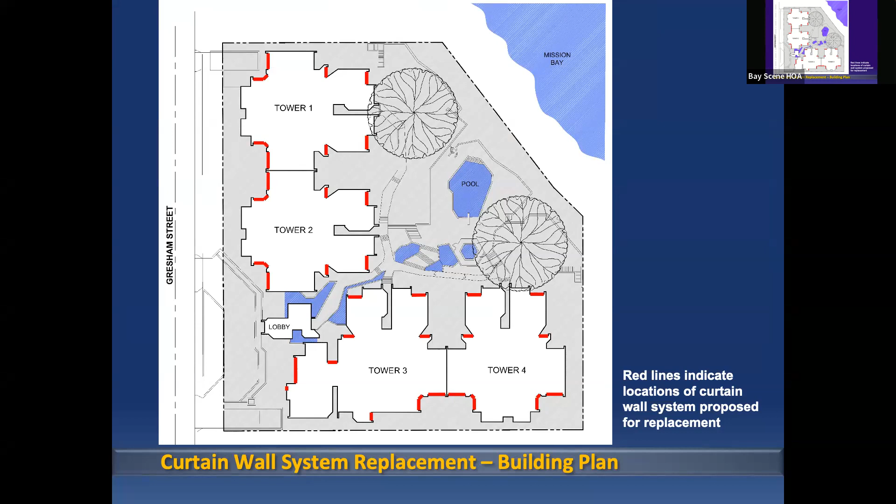So there's the curtain wall. You can see it in proximity to the other issues that we talked about. Next, please.

So why fix the windows? Well, we've got aged and deteriorating windows. There's a significant amount of water and air intrusion. The existing system can't really handle more retrofits, it's not designed to do that. It has very poor thermal and acoustical capabilities.

As we researched it through, there's a measuring agency out there, not UL, but similar. They basically give curtain wall systems about a 35-year lifespan. We're at 50. Fannie Mae says so. So if you're evaluating your building, Fannie Mae says you should expect to get about 35 years out of your curtain wall system, and we're at 50.

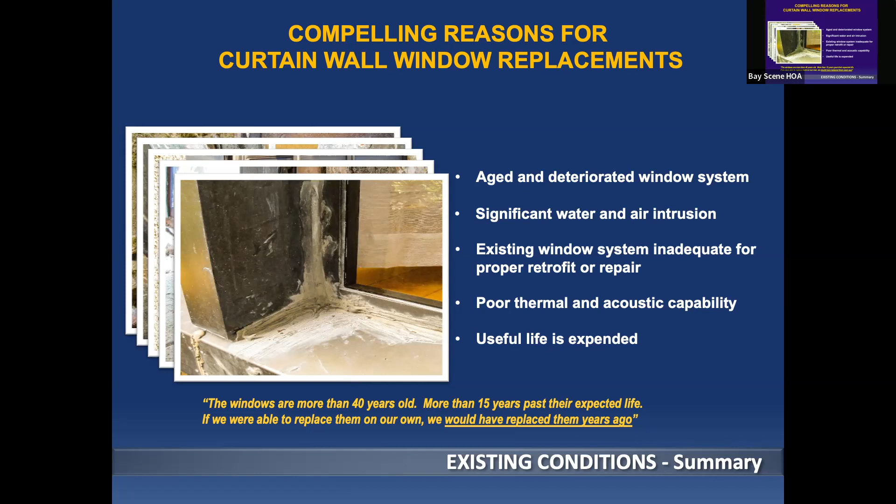Next, please. The benefits: you would get better interior air quality, better ventilation, the openings are going to be bigger, improved energy performance, acoustical performance, and the safety factor improves. Weather protection, keeping the building tight. Somebody asked earlier about mold in regard to the underfloor, but I've been advised that some people have experienced mold inside their units from moisture intrusion, and that's something that can be avoided by the replacement project.

Get rid of the noise and odor control issue, better privacy. With a new system, you'll obviously get warranty and service, besides just a better look to it. We did bring a sample up here, so if there's a break and you want to take a look at it, this is a very small mock-up. When you get to the openable part, you'll find it's a little stiff and there isn't a handle on it. Those things can be worked out, but we wanted you to see the size of the construction we'd be talking about and the quality of it.

We originally started with a Kawneer system in mind that we would design to. As we've priced through Nautilus, we also asked them to look into alternatives from US Aluminum, from Oldcastle, and from Arcadia. It seems like the contractors in town really prefer Arcadia, so that's actually what we're pricing, an Arcadia system for this project.

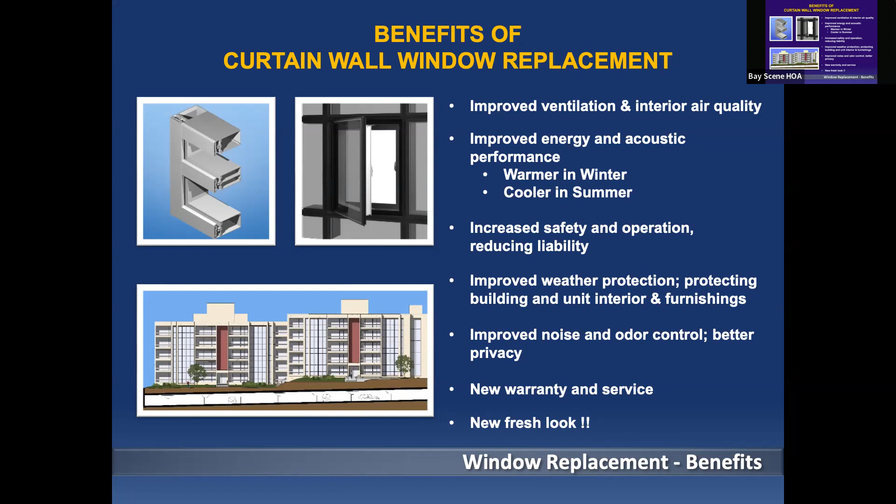All right, so we can entertain questions about the windows if you'd like. Yes, sir.

Thank you. Bill Peach, 112. Just a couple, I think, simple questions, which I've forgotten already. Must be my age. It was a long way from there. And then I blessed myself, so I shouldn't have done that. No, I don't remember. It was just a couple. Well, when you think of it, come on back. Come on back. That's fine.

Feel your pain. Yeah, hi, Robert Perry. I'm here on behalf of Nancy Greenberg. I was her late husband's best friend, and I do what Doug does. In fact, I didn't recognize you, Doug, because you've got a lot more gray hair now. All right, but anyway, I've done this kind of work for homeowners associations, so I have great appreciation for all the work that you've done. A couple questions. Oh, by the way, your window expert is also a friend of mine. I saw him on a 36-story tower in Vegas about 6 months ago, Jim Kenway. So he now lives in Idaho, but he comes down for these projects.

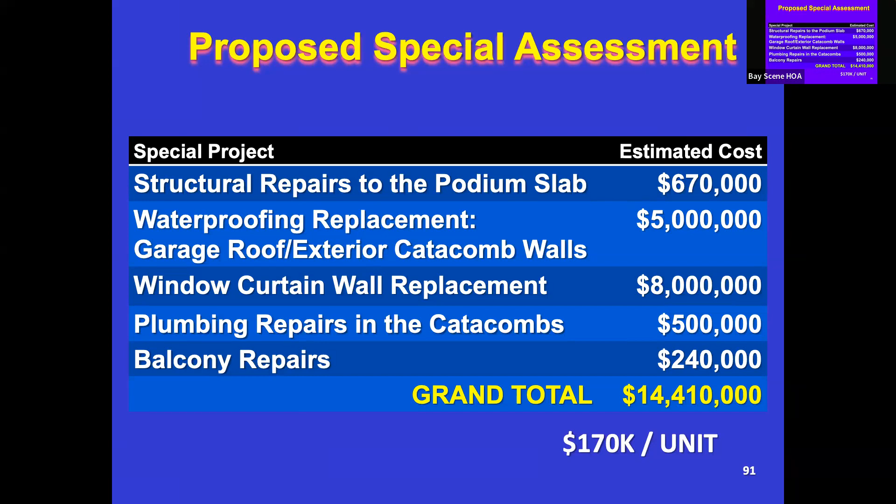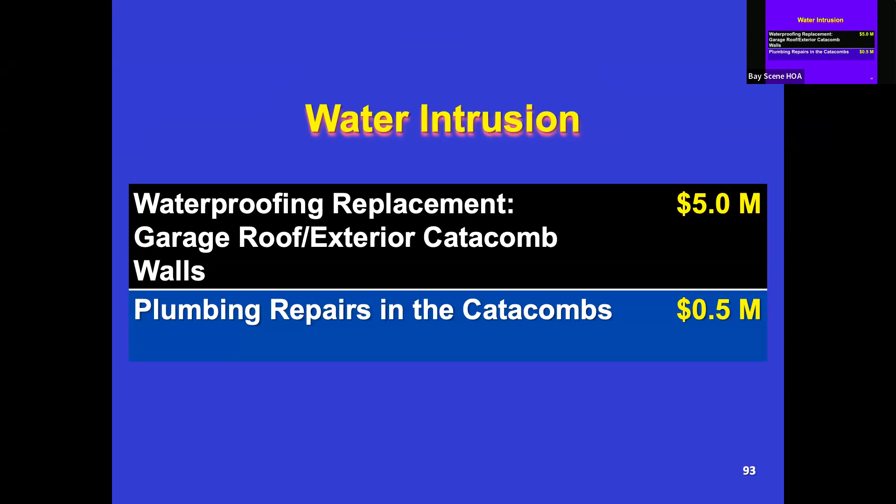Next slide. I don't think I need all these slides, I'm going to go through these very quickly because we need to get to Bob. Structural repairs was 670,000, we just said that. Waterproofing, it was the 5 million plus another $500,000 for the catacomb piping repairs. Here's the waterproofing we talked about. Next slide, they've done that. Plumbing issues, there's some samples there. Done that.

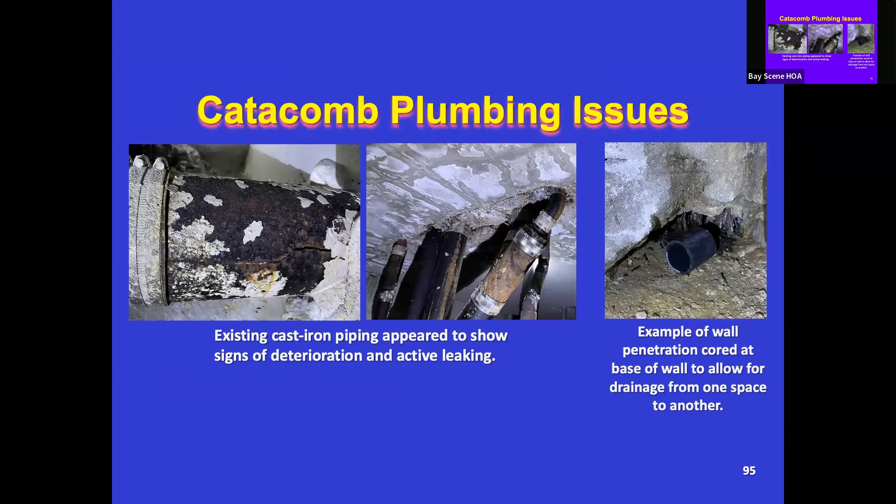Okay, talk about the curtain wall. So Doug Whitmore explained the difference between the window wall and the curtain wall, and the benefit of the curtain wall and why we have a curtain wall system, and the fact that you can't piecemeal a curtain wall - it's an all or nothing deal. So many homeowners, we saw the percentage of homeowners who have leaking windows. Now, if you think, well, let's not do the window wall, let's do the waterproofing first - okay, well guess what, we're going to be spending hundreds of thousands of dollars to fix all those leaking windows and make temporary hodgepodge repairs to a 50-year-old system that needs the whole thing replaced. We don't do it now all at one shot, we're spending a lot of extra money that we don't need to. It's best to get it all done at once. Next slide, so yeah, I think they talked about the balconies.

They identified 11 high priority needs. I got a call from a homeowner and went and looked at that. I want to add one more to that one. You guys didn't see it because you didn't go up and look at the slab, but her slab is all cracked. 16 balconies is medium priority, showing large cracks in the stucco, and 23 is low priority. I guess your estimate was only for the high and medium priorities, and then some balcony issues.

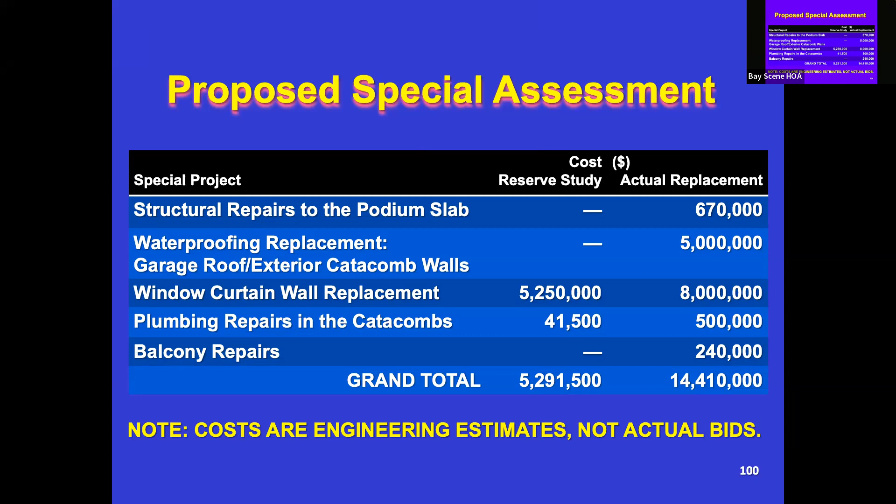Obviously, replacement costs are defined as the current estimate of repairing or replacing major common area components such as roofs, windows, plumbing, security systems, and landscape over the long term. Before you think, well, why didn't the guys that did the reserve study have this kind of stuff in, basically they'll say right in that reserve study, anything over 30 years, we don't even put in the reserve study. I don't think anybody was thinking about waterproofing.

They certainly had it for the windows, but we've moved those windows up over the last 10 years. We had no idea it would be $8 million. This is a very big surprise to us. When we were talking about it before, I can remember when we thought we could do this for $1.4 million.

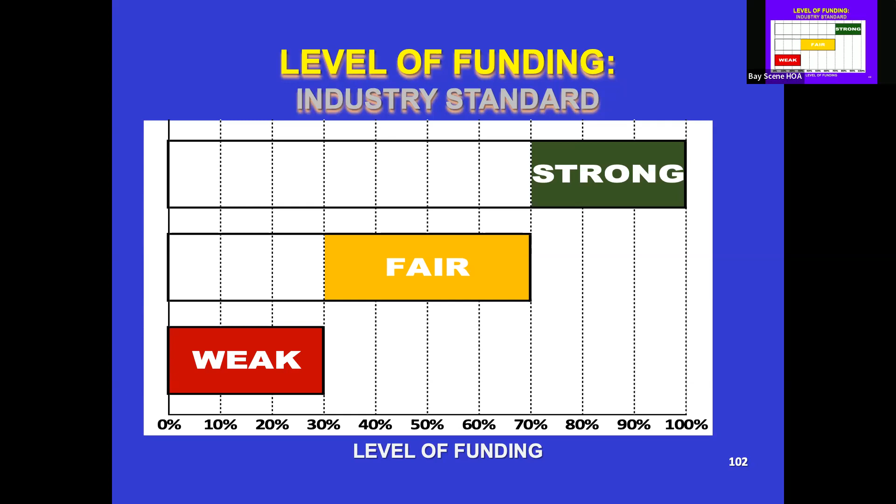As far as financing options, if you could go to the next slide.

Obviously some people will want to pay it up front in full, the $170,000. We have talked to some lenders that will take the income stream of the condo association as security for a loan. In most cases, in talking to the lenders, anywhere from 10% to 30% of the people will take a loan. In most cases, 70% pay in cash.

When talking to the lender, they had spent a lot of time, effort, and money with respect to the Harbor Club condos downtown across the street from the convention center this last year on a $6 million loan, because people said they needed a loan. When they ended up, nobody took the loan, and arranging for that $6 million loan was just a big waste of time and cost.

So I'm going to say, if you want this association, because we have to change our CC&Rs, and we're doing some changes to the CC&Rs, and there'll be more changes before we get done, to allow us to do some of this kind of financing.

They will loan us the money for 10 years, and the rate today, if it closed, they set the rate, it's a fixed rate. So it's a 10-year fixed rate. They will set it 5 days before funding, 5 days before you actually take the loan. Today's rate is 6.5%. I don't think there's any doubt that by the time we have this project ready to go, that rate's probably going to be closer to 7, maybe even a little bit higher.

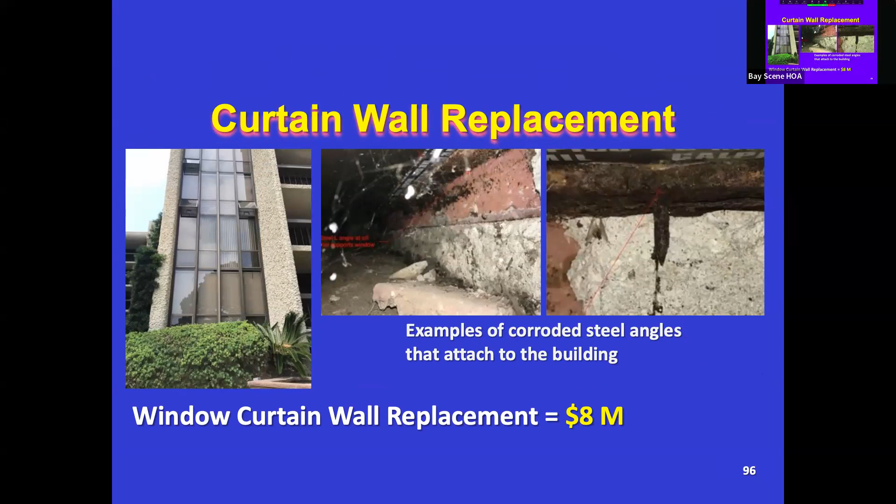In addition to the special assessment, Bob has already talked about this. We need to do some changes to the CC&Rs. The one he mentioned was one we were going to have with the election, but these are some other ones. These changes to the CC&Rs would probably come out the same time you're voting for the special assessment. One would be a change to allow us to borrow funds. That's CC&R paragraph 8.3. It allows us to borrow funds on behalf of the association without changing the CC&R. Without that, we cannot do the borrowing.

If the loan agreement is more than 10 or 11 years, you need another change of CC&Rs, paragraph 5.3. We've been told the contract will be at least 18 months to do the work, including windows and excavating for waterproofing. But right now our CC&Rs say we cannot have contracts in excess of 1 year. So we'll need to change the CC&R language to allow a construction contract longer than 1 year. These changes will be included when we ask you to vote for the special assessment. It's all one package.